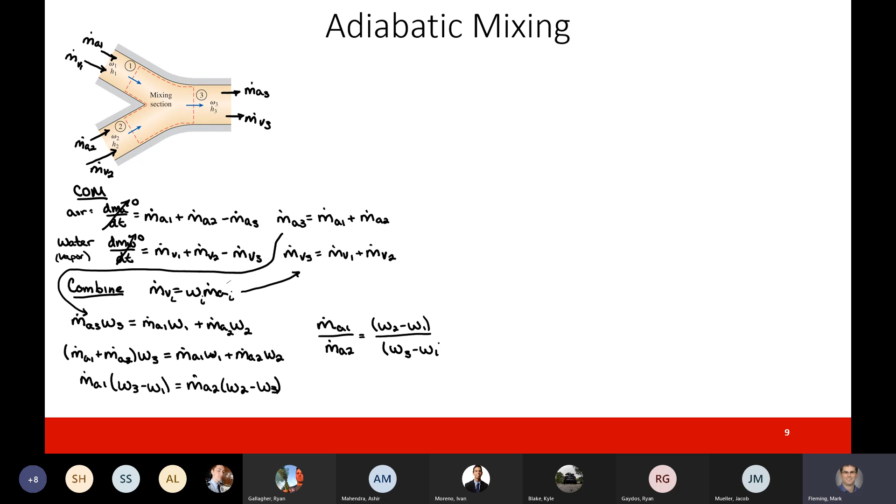Now, this is just the setup. We'll get to why this is important once we do the next part, and that is conservation of energy. And again, this is just W2 minus W1. That was just part 1.

Okay, any questions on part 1? I could be wrong, but did you maybe switch out a 1 for a 3 in the numerator? Shouldn't it be W2 minus W3? Yeah, I think I did. Sorry, good point, you're right. This is a 3. Could be 2 minus 3 over 3 minus 1. Yeah, I got ahead of myself on my nomenclature there. So yeah, again, W3 here. My bad. Okay, thank you for catching that.

All right, let's push forward now into conservation of energy. For conservation of energy, we're going to set up our energy accounting equation. So dE/dt for the system, we'll assume steady state, so that goes to 0. This is going to equal the heat transfer rate in minus the rate of work out, plus the sum of the mass flow rates in times the enthalpy in plus kinetic energy plus potential energy, minus the sum of the mass flow rates out times the enthalpy plus kinetic energy plus potential energy.

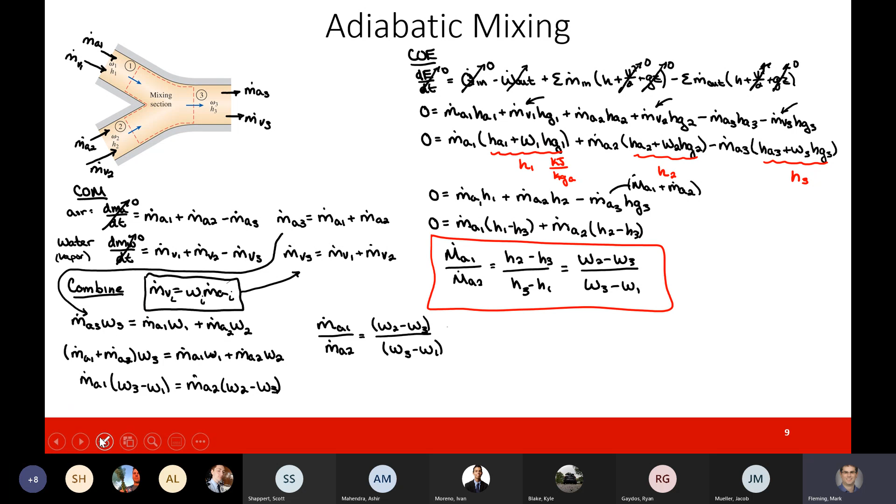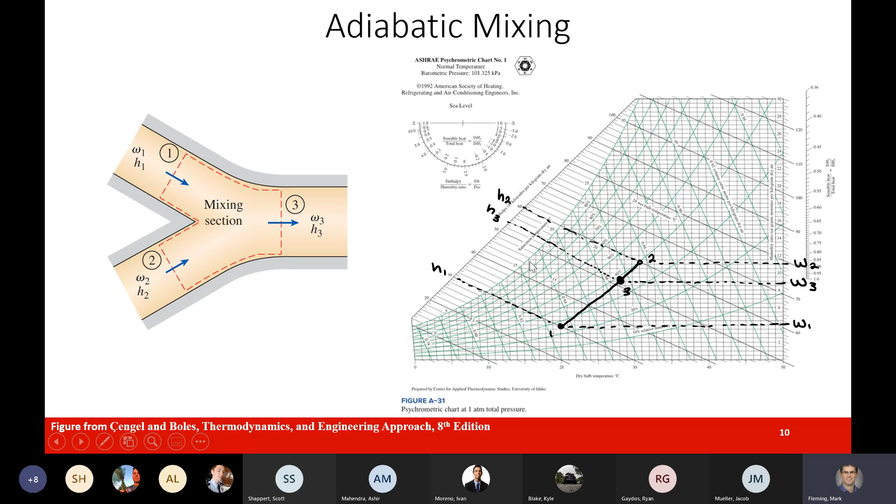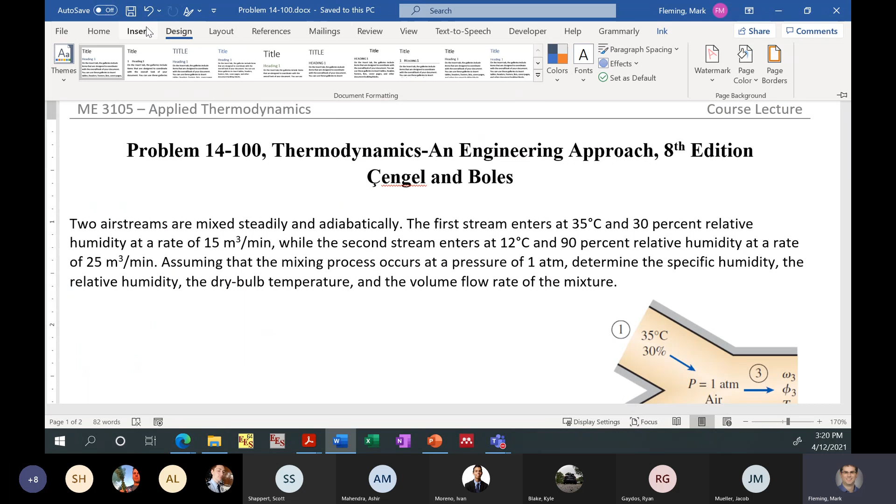Okay, so now that we've seen what we'd expect on the psychrometric chart, let's go ahead and work an example problem. We'll go ahead and just save that, and we'll switch to the example problem at this point. I'm going to have to quickly switch back to this. Hold on. I don't have the pen marker here.

Okay, there we go. Should give me the ability to write on it now. Okay. So we have this example problem where we're going to actually apply all of these concepts, and we're going to see how everything comes together for these psychrometric processes. So in this problem, we're going to have two air streams

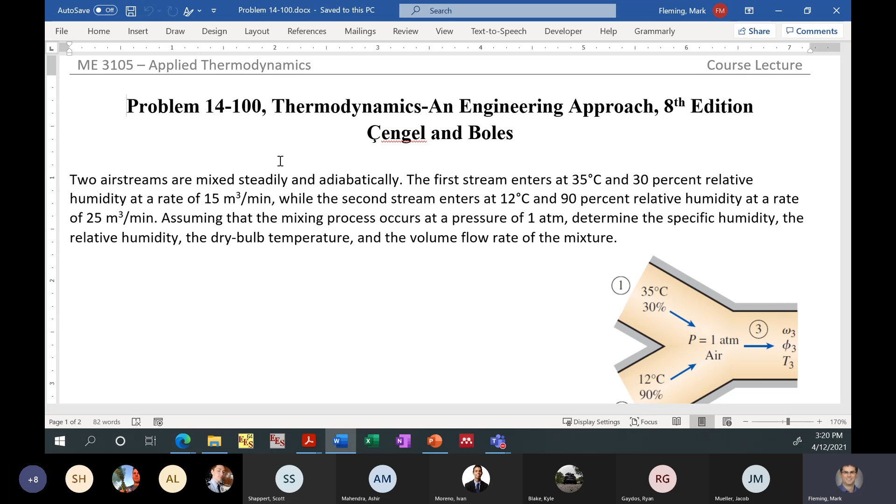that are going to be mixed in a steady and adiabatic fashion. The first stream is going to come in at 35 degrees Celsius, 30% relative humidity, and have a flow rate of 15 meters cubed per minute. Well, the second stream is going to come in at 12 degrees Celsius, 90% relative humidity, and a flow rate of 25 meters cubed per minute. We're assuming that the entire process happens at 1 atmosphere.

We're asked to determine the specific humidity, the relative humidity, the dry bulb temperature, and the flow rate of the mixture at state point 3. And so there's a lot that has to happen in this problem. So let's go ahead and begin by writing down all of our known parameters.

And in terms of our known parameters, we have two states to establish. So the first state that we have to establish is state number 1, and we know that the temperature is going to be 35 degrees Celsius. We are going to know that we have a relative humidity of 30%. And we also are going to know that we have a volumetric flow rate for number 1 of 15 meters cubed per minute. Okay. So that's state number 1.

For state number 2, we also have the incoming temperature. This is going to be 12 degrees Celsius. We'll have the relative humidity at state 2. This is equal to 90%. And then the last thing that we have is the volumetric flow rate at state 2. This is equal to 25 meters cubed per minute. So those are our knowns. The last thing that we're going to note is that we have the pressure, P1, P2, and P3. These are all going to equal 1 atmosphere. And for conversion purposes, this is 101.325 kilopascal. And so we have the pressure of the system.

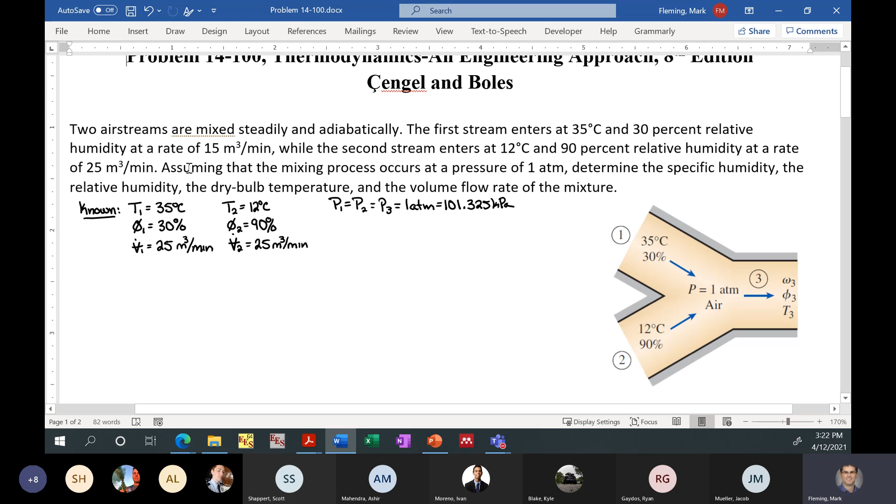All right, so once we have all of those properties that we know, we should go ahead and write what we need to find. And so in terms of our find statement, we're asked to find first the humidity ratio at state 3. We're asked to find the relative humidity at state 3, the actual temperature of state 3, and then lastly, the volumetric flow rate at state 3. So we have a lot of things that we're going to be looking for in this problem.

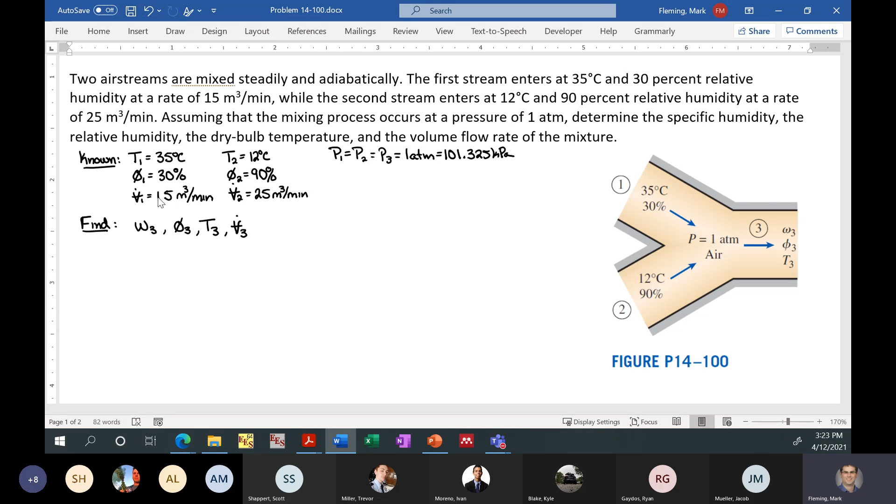Professor? Yes. Volumetric flow rate for the first one is only 15 meters cubed per minute. Yeah, sorry. Thank you. I looked at state 2 and I wrote state 1. So thank you for pointing that out. All right. Okay.

So now that we have everything set up, let's go ahead and get to what we need to assume to move from our knowns to our find statements. So let's write down what we need. Now, in terms of the assumptions, we're going to assume it's going to be an open system. So we're going to use the rate form of the energy and mass balances. We're going to need enthalpies. We can assume that it's going to be a steady state process. We're going to assume that it occurs in an adiabatic fashion.

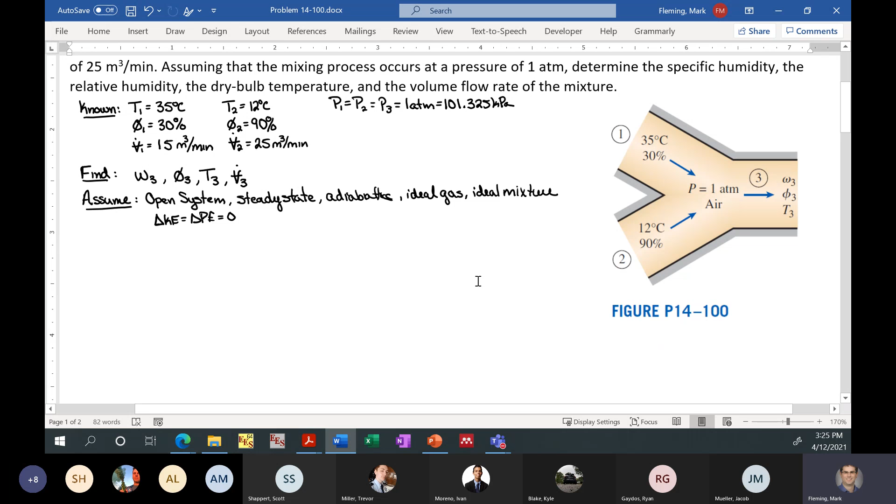And we can assume that we're going to deal with air as an ideal gas, and the mixture can be treated as an ideal mixture. We're also going to neglect our kinetic and potential energies because we don't expect those to play much of a role in this energy balance. And so that should give us a pretty good starting point in terms of all of the assumptions that we need to make. So let's go ahead and push forward into the analysis.

Okay, so for the analysis, what I'm going to suggest for this case, because we have a lot of things going on and there's a few things that we need to figure out here at the beginning, is let's go ahead and look at each state independently before we do any sort of mass or energy balance. So let's just take a look at what's going on at state number 1. Now at state number 1, just to recap, we know that the pressure is going to be 101.325 kilopascal.

So we're going to use that for our calculations. Now, in terms of the first thing that we need for a calculation, we know that we're going to need the temperature that's going to come into play. We know that that was 35 degrees Celsius. And so we have that variable, and then we also have the relative humidity.

This was 30%. Now, relative humidity, we can say, well, we know that will get us the partial pressure of the vapor at state 1 if we know the saturation pressure at state number 1. And so we said, well, to get saturation pressure, we're going to have to use the temperature at state number 1. And the temperature, when we go to the tables, we said, well, that's just the saturation pressure. So we can get P sub G1 at this point. And so that value is going to be 5.6291 kilopascal.

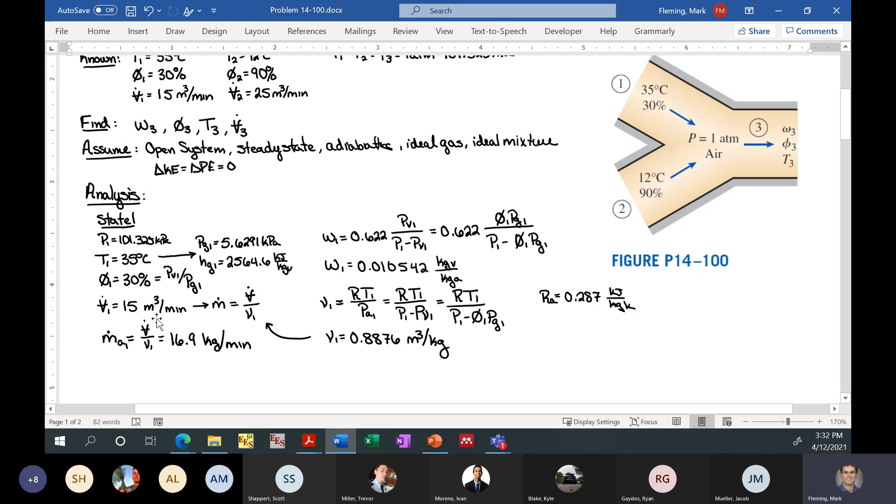Okay, so if that is the first thing that we needed to do, let's now push forward into the second part, which is the state 2 setup. So basically, we're just going to repeat this now for state 2. What we know at state 2 is the temperature is 12 degrees Celsius. For our lookup parameters, we're going to need P sub G2, the pressure for the saturation condition, which is 1.4191 kilopascal. We also need the enthalpy for the vapor at state 2, which is 2472.48 kilojoule per kilogram of vapor.

Okay, so the other part that we know is the relative humidity at state 2, which is 90%. If we recall, this gives us the partial pressure of the vapor over the saturation pressure at state number 2. With all of this information, we want to repeat the previous calculation from part 1 to get the specific humidity ratio. So we do 0.622, and I'm going to go ahead and just get to the final form: Phi2 P sub G2 over the pressure at 2 minus Phi2 P sub G2. So we have it as a function of the relative humidity and the saturation pressure at state 2. Again, this is all a function of just T2.

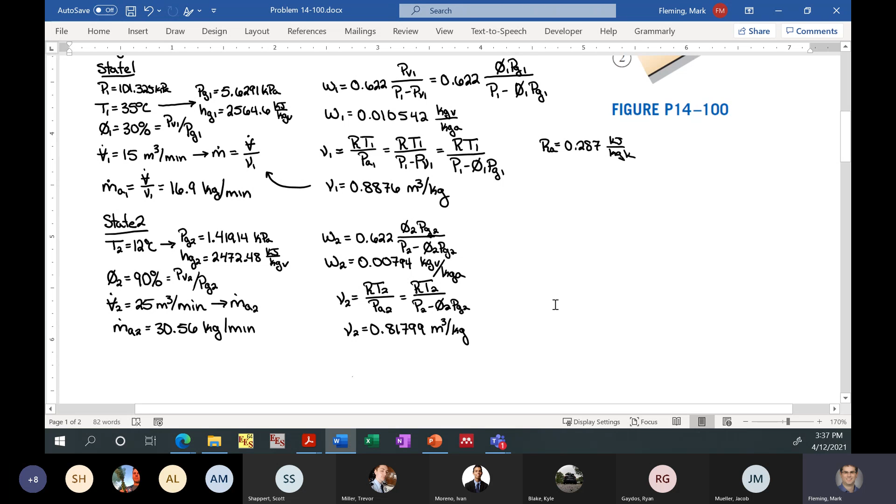Okay, so now we've spent some time. We've figured out how to apply all of these parts. We've gotten state 1 and state 2. Now comes the complicated part of finding state point number 3. To find state point number 3, we're going to have to use our energy and mass balances to figure out everything that we need to know. And so to get to state 3, that's exactly what we're going to do.

Now, the first thing that we should do is go ahead and look at our mass balances, and we'll start with air. In terms of air, the change in mass of air with respect to time inside of the system goes to 0 because of steady state. Then we have the mass flow rate of the dry air at state 1 plus the mass flow rate of dry air at state 2 minus the mass flow rate of the dry air leaving at state 3. We have now the mass flow rate of dry air at state 3 equaling the mass flow rate of dry air at state 1 plus the mass flow rate of dry air at state 2. So we saw that from our previous example.

Now what we could do in this case is go ahead and calculate the mass flow rate of dry air at state 3. If we wanted to do that, we can just use the two previous values, and we can say that this becomes 47.46. Units on this would be kilograms per minute. So we have the mass flow rate of the two flows combined for air.

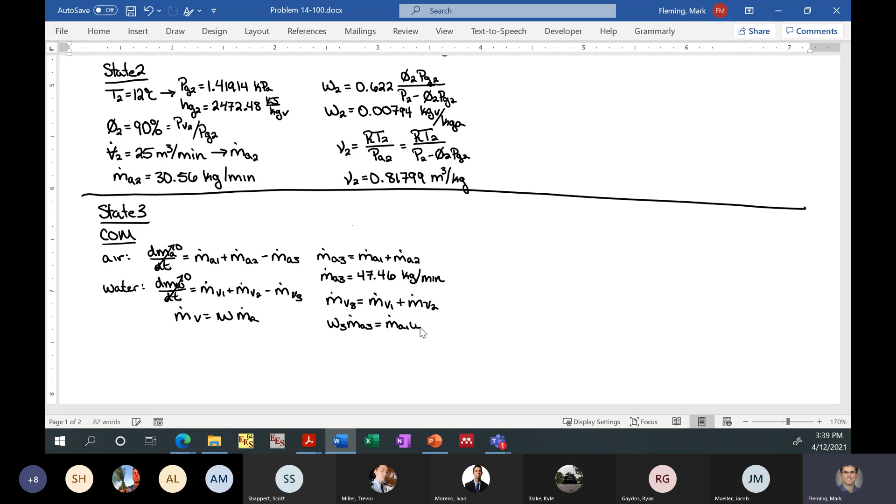Using the substitution that we've used, the mass flow rate of the vapor can be the humidity ratio times the mass flow rate of dry air. We can get that the humidity ratio of 3 times the mass flow rate of air at 3 equals the mass flow rate of air at 1 times humidity ratio 1, plus the mass flow rate of air at state 2 times humidity ratio of 2. And what we want to do is first solve for the humidity ratio at state 3.

So doing that, we can get the humidity ratio of state 3. This is the mass flow rate of dry air at state 1 times humidity ratio of 1, plus the mass flow rate of dry air at state 2 times humidity ratio of 2, divided by the mass flow rate of dry air at state 3, which we know is just air of 1 plus air of 2, which we calculated. Because we know all of the humidity ratios at state 1 and state 2, and the mass flow rates at 1, 2, and 3 for dry air, we'll put all of those numbers in our calculator, and we get the humidity ratio is 0.00887 kilograms of vapor per kilogram of dry air.

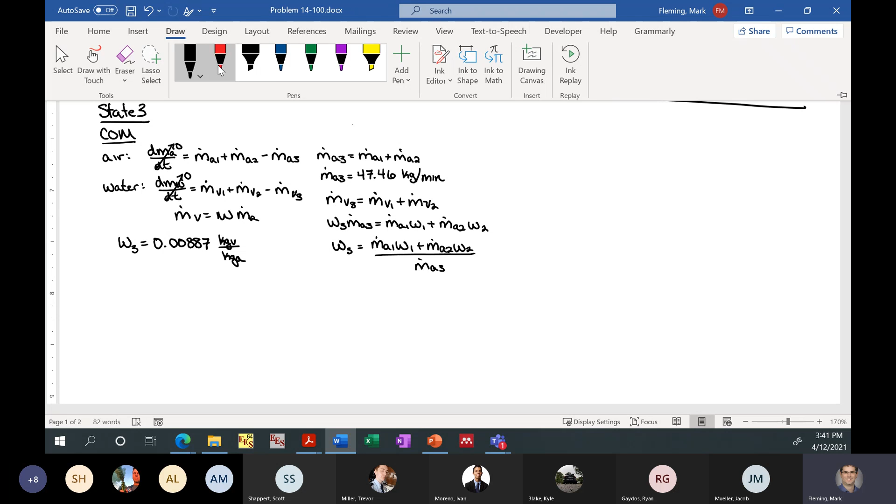And so there we go. We have our first deliverable taken care of. Okay. So that wasn't too bad. We just used conservation of mass. We got one of the things that we needed to take care of off the list. And so now we just have to figure out what is the relative humidity and the temperature at state 3. So let's go ahead and do that.

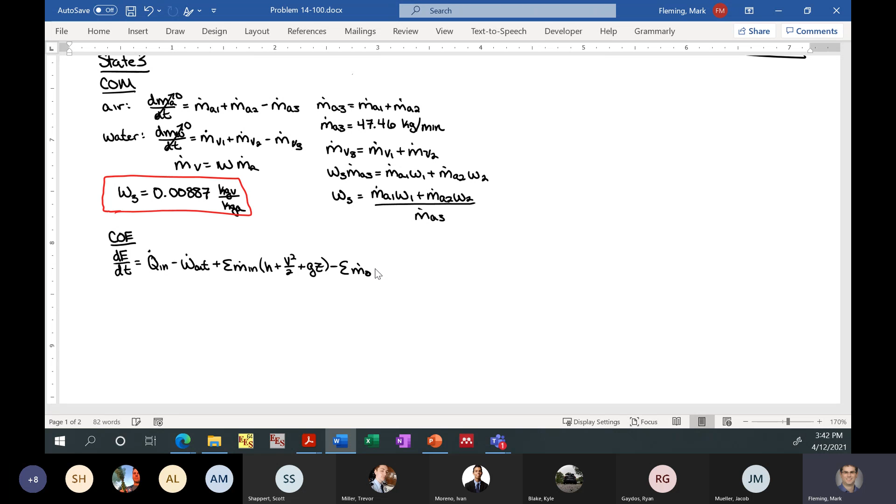We realize temperature is going to involve some sort of energy state. So let's go ahead and look at what happens when we apply conservation of energy for the system. In terms of the conservation of energy equation, the change in energy inside the system is equal to the heat transfer rate in minus the rate of work out, plus the sum of the mass flow rates in times the enthalpy plus the kinetic energy plus the potential energy of the flows in, minus the sum of the mass flow rates out, times the enthalpy plus the kinetic energy plus the potential energy of the flow leaving.

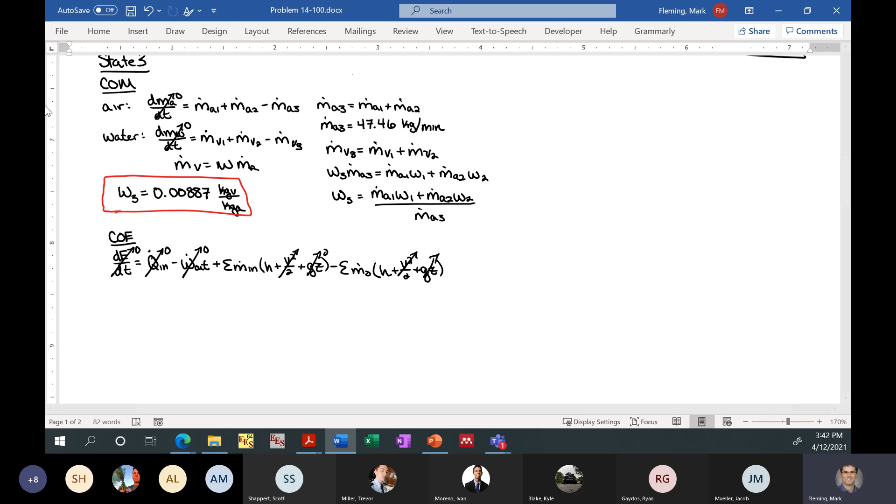Okay. So we can go ahead and apply assumptions. Left-hand side goes away, steady state. Heat transfer rate also goes to 0 because we said it's adiabatic. We have no turbo machinery in the system, so we can get rid of the power. We said that we could assume that there was no kinetic or potential energy effect, so that goes away. We're left with mass flow rates times enthalpy, and that's exactly what we expected at this point.

Now, what we'll do is step by step work through all of the details. In terms of the mass flow rates coming in, we'll have the mass flow rate of the dry air at state 1 times the enthalpy of the air at 1, plus the mass flow rate of the vapor at state 1, enthalpy of the vapor at state 1. We can now repeat this for state 2: the mass flow rate of the air at state 2, enthalpy of the air at state 2, oops, it should be air state 2. Then we have the mass flow rate of the vapor at state 2, enthalpy of the vapor at state 2, minus the mass flow rate of the dry air at state 3, enthalpy of the air at state 3, minus the mass flow rate of the vapor at state 3, enthalpy of the vapor at state 3.

So a lot of things to keep track of, but again, we just had two basically flows at each of our states that we've established. We put those onto paper, and then we can combine the enthalpies into a single flow. Again, this is just the humidity ratio times the mass flow rate of dry air. We're going to make that substitution everywhere we see the mass flow rate of the vapor. So what we'll end up with is the mass flow rate of dry air times the enthalpy of the dry air at state 1 plus the humidity ratio of 1 times h sub g1, plus the mass flow rate of the air at 2, the enthalpy of the dry air at 2 plus the humidity ratio of 2 times h sub g at 2, minus the mass flow rate of the air at state 3, enthalpy of the air at state 3 plus the humidity ratio of 3 times h sub g3.

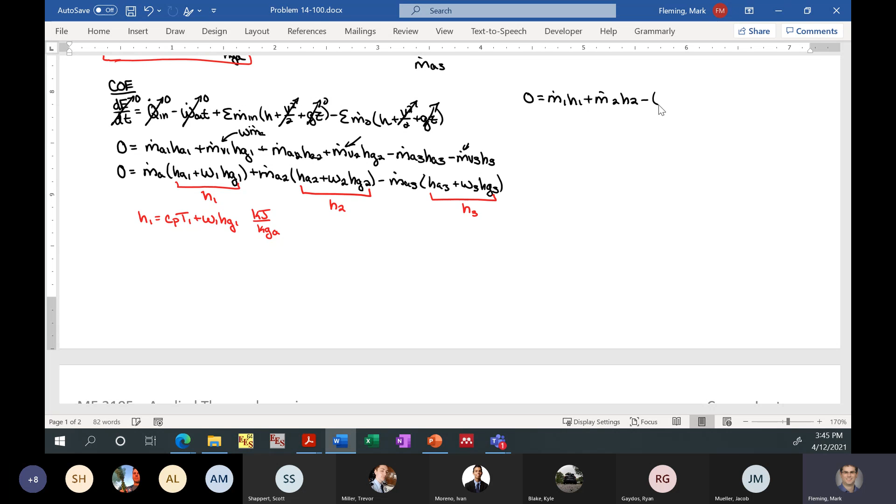Now, what this allows us to do is reset our energy equation as 0 equaling the mass flow rate at state 1, enthalpy of state 1, plus mass flow rate 2, enthalpy of state 2, and then minus the mass flow rate of state 3, enthalpy of state 3. And so we've just reset this equation. What we want to do now is solve for the only unknown, which would be the enthalpy of state 3. So we have the mass flow rate, this would be dry air, this would be air, and this would also be air at state 3. So we have the mass flow rate of air at state 1, enthalpy 1, plus mass flow rate of the air at state 2, enthalpy state 2, divided now by the mass flow rate of dry air at state 3.

If we go ahead and do the combined lookups, again enthalpy 1 using c sub p T, T will be in degrees Celsius. And we say c sub p, I'll write this down, for air this would be 1.005 kilojoule per kilogram Kelvin. So if we do those values, what we'll find is the enthalpy of state 1 will be 62.21 kilojoule per kilogram of dry air.

We can get enthalpy of state 2. This is going to equal 31.69 kilojoule per kilogram of dry air. And then if we put in these numbers, we can now solve for the enthalpy of state 3. Enthalpy of state 3 is going to equal 42.6 kilojoule per kilogram of dry air.

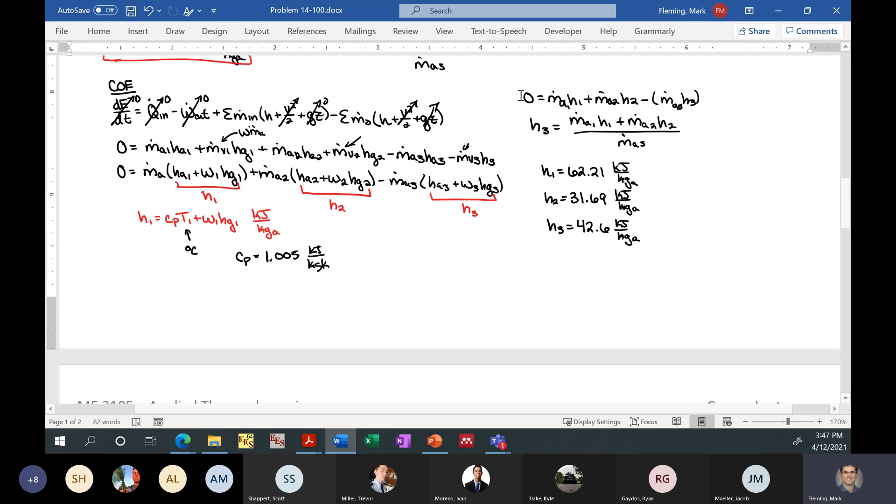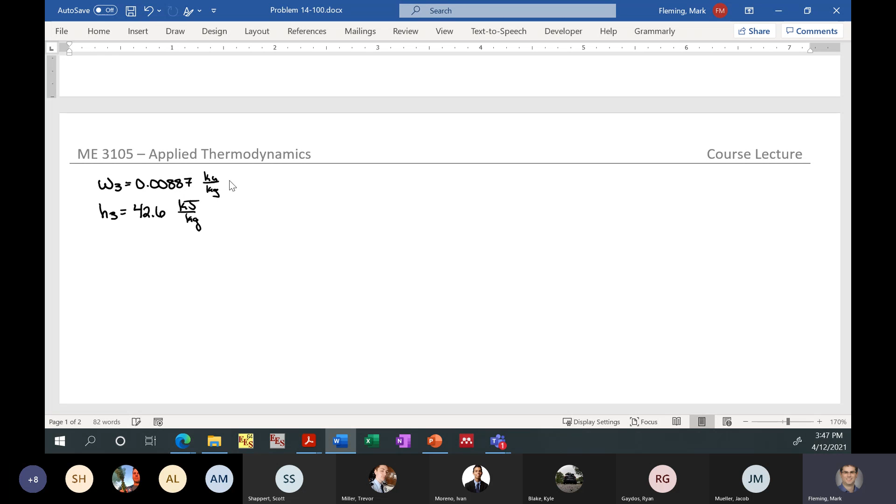Okay, so we now have a humidity ratio, we have an enthalpy, we have two parameters we can use to determine our state. So we now know W3, again, this was equal to 0.00887 kilogram per kilogram. We know H3, this was equal to 42.6 kilojoule per kilogram. And so what we want to do is we want to take these two variables, we want to convert that into our relative humidity at state 3 and our temperature at state 3.

Now to do that, it becomes an iterative process because while we have the enthalpy, we could say enthalpy 3 becomes C sub P T3 plus humidity ratio of 3 H sub G3. But this is a function of temperature, and that becomes a little bit harder. And we could set this up in Excel. We could do some iterative solving, but it would be easier to just take this to the psychrometric chart and use it at this point.

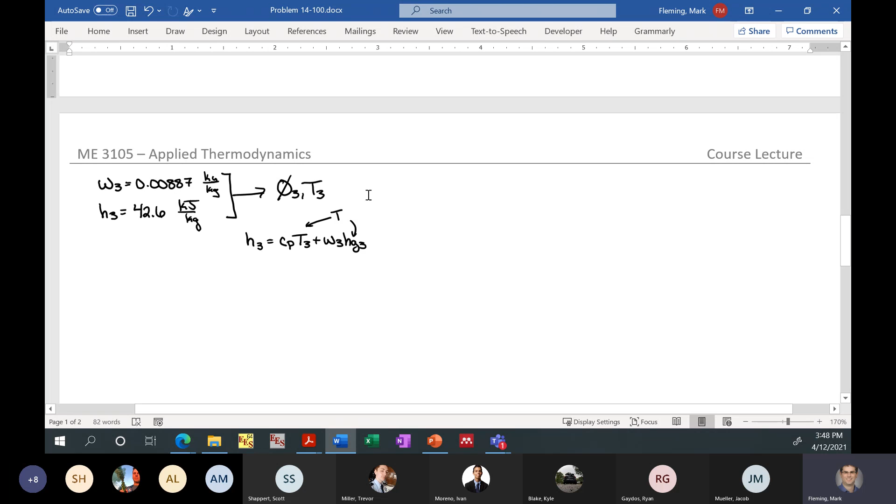And so knowing we have a humidity ratio, knowing we have an enthalpy, we can come down to the psychrometric chart. And I went ahead and added some lines. And so we know the humidity ratio at 3, again, 0.0088. I think that was 887. And so that's almost 0.009. So that's right here on the chart. So just a little bit shy of that, we draw a horizontal line.

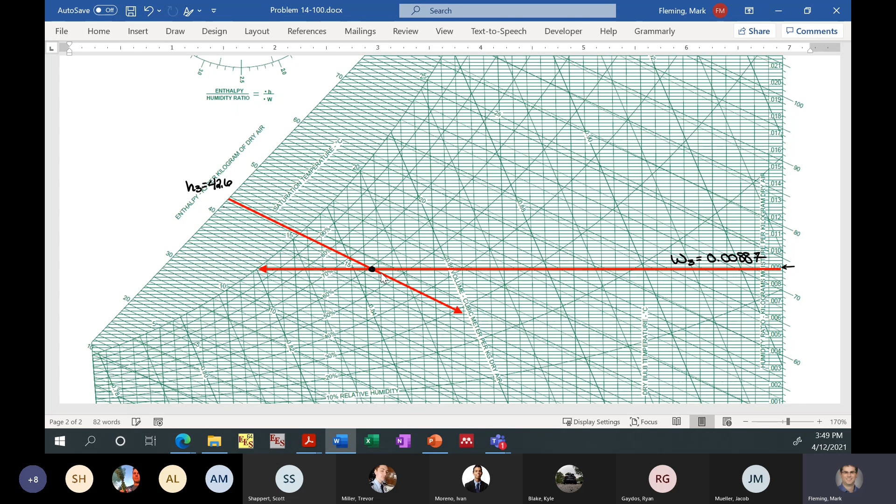We see over here, we knew the enthalpy at state 3, which is equal to 42.6. So this would be 40, 41, 42, and just over halfway between those two lines. We draw another line coming down. We see that those intersect right here. And so we'll call this point right here state 3. And so if we want the temperature, we just have to now move vertically here. And so if we come down here, we can say, well, that's 20. Let's say that's about 20.2.

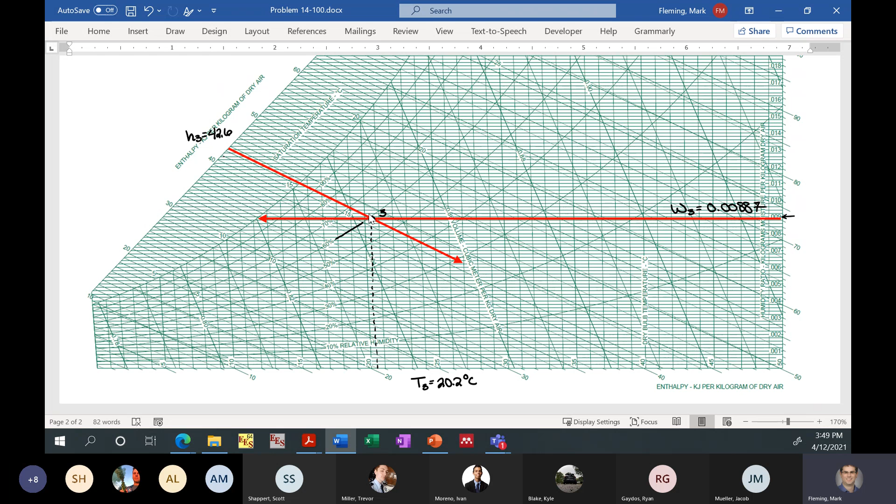So T3 should equal about 20.2 degrees Celsius. We want the relative humidity. We can see that the closest line right here is about 60%. We're just below that. So if we wanted to estimate that value, we'll say it's about 59%. So there we go, 2 values calculated directly using the psychrometric chart.

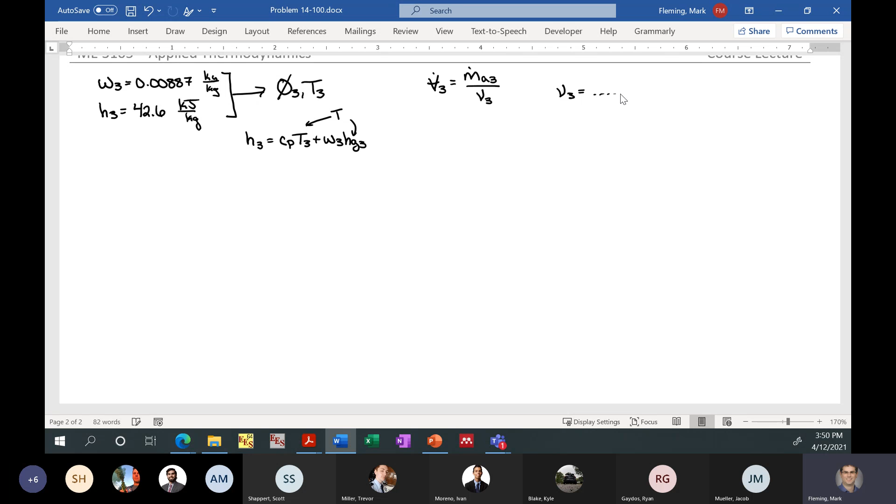Okay, now there's one more deliverable that we had left, and that was to calculate the volumetric flow rate for state 3. So volumetric flow rate at state 3. So what we want to do is we said, well, let's get the mass flow rate of dry air at state 3. Now we could do the specific volume at state 3. And so we could, again, calculate specific volume using the same method that we've done before. But what I want to show you is we could also do this with the psychrometric chart.

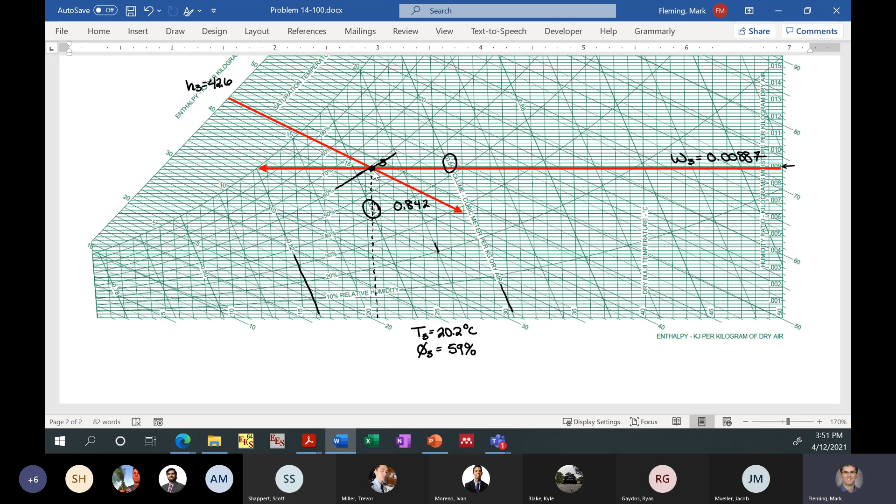So on the psychrometric chart, we have some lines that move up and to the right. So here's one right here. Here's one right here. And so we look for the closest one, and we see that this value is going to be 0.84. So that should be 0.85, 0.86. And we say, well, if we drew a line between those, we're maybe part way through, so not quite half. So maybe we say we're about 0.842, so not quite halfway, just under that, so 842. And so we could say, well, this could also equal 0.842 meters cubed per kilogram.

And so that's actually what it comes out to be, pretty close when we do the actual calculation, which means that if we finish this off, volumetric flow rate at state 3 equals 39.96. This will be meters cubed per minute, which we can basically say at this point is probably going to be about 40 meters cubed per minute if we ignore some of our rounding. And so that is going to be the last portion of the deliverable. So we can go ahead and box that value. And then we had those 2 other values that we pulled right off the psychrometric chart, about 20.2 degrees Celsius and about 59% relative humidity.

So that is how we're going to be able to use the psychrometric chart for some of our mixing processes. You will have to do something similar on some of your homework, so you will use the psychrometric chart. It will be easier than doing the iterative solutions, which is why I wanted to do this example problem. But at this point, that is going to be the end of this example and end of the lecture today.